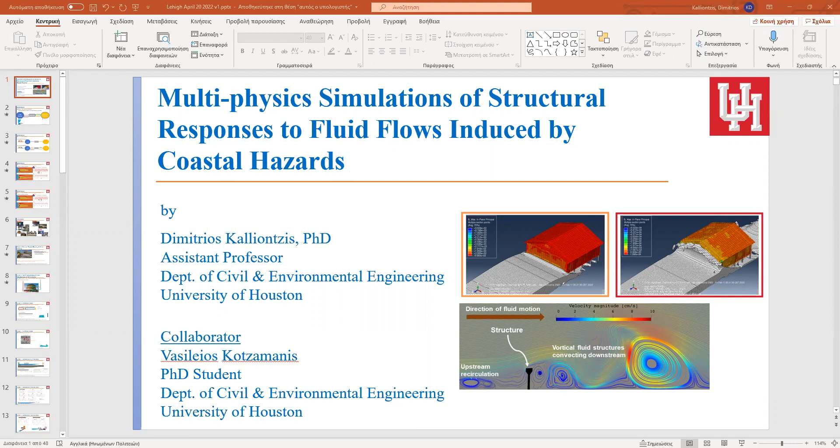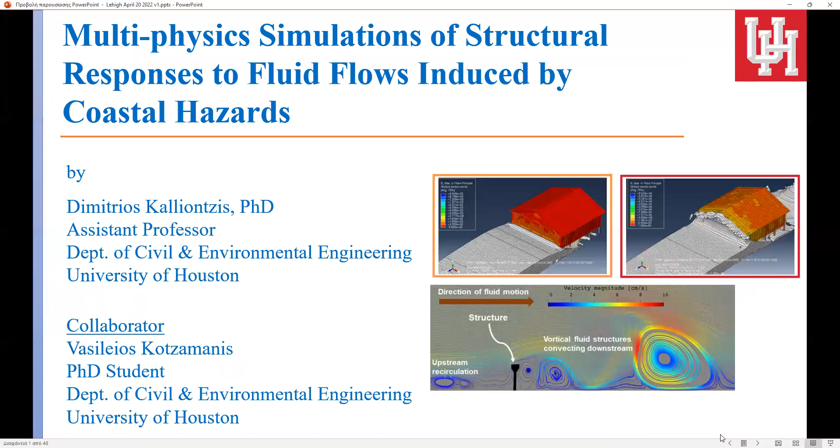So in the first, Dimitrios, sorry, yes—can I interrupt you a minute? Because we only see the first slide, your title slide. Are you still on that title slide? Oh, really? No, no, I'm sorry to interrupt. Maybe if you go into presentation mode, that may work better there. Yeah, thank you. Sorry for interrupting. Oh, okay, I thought—sorry, I'd give it a little bit of time to make sure. Okay, thanks. Yeah, thanks Jim, I didn't pick up on that. I thought the presentation was moving forward because to me it was, but how about now? Is it better? You're good now. The background slide is now... Okay, okay, great. I thought that was on.

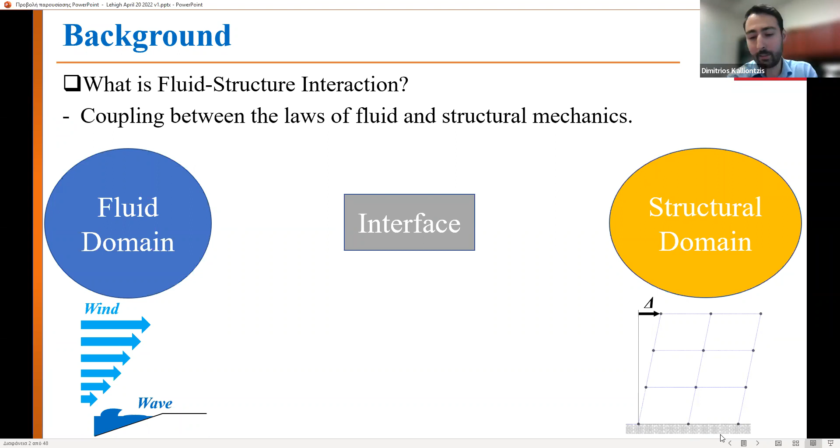So yeah, basically, let me go back a little bit in my discussion so that everyone follows up on what I'm talking about.

So again, I'll go through the definition of fluid structure interaction. What I was mentioning is that in fluid structure interaction, you have the fluid domain, the interface between the structure and the fluid, and the structural domain. Usually the fluid forces are transferred to the interface, then from the interface back to the structure, and the structural deformations also go back to the interface, affecting the behavior of the fluid domain.

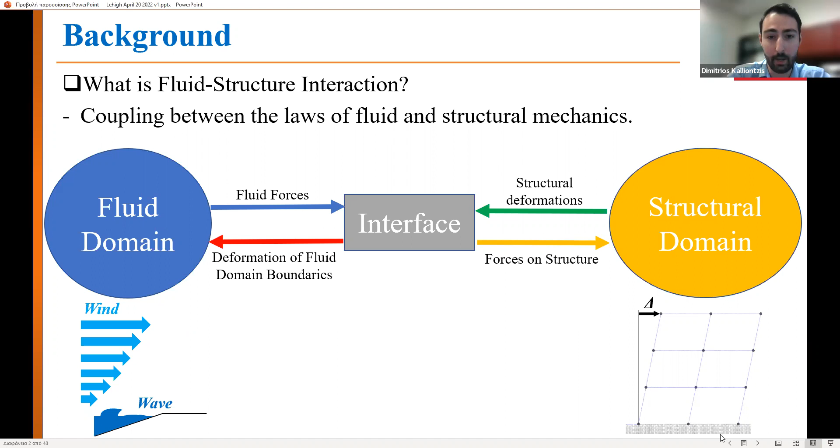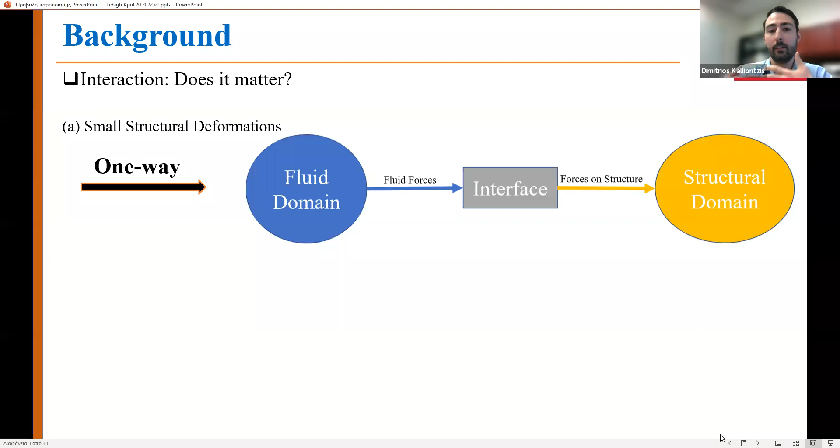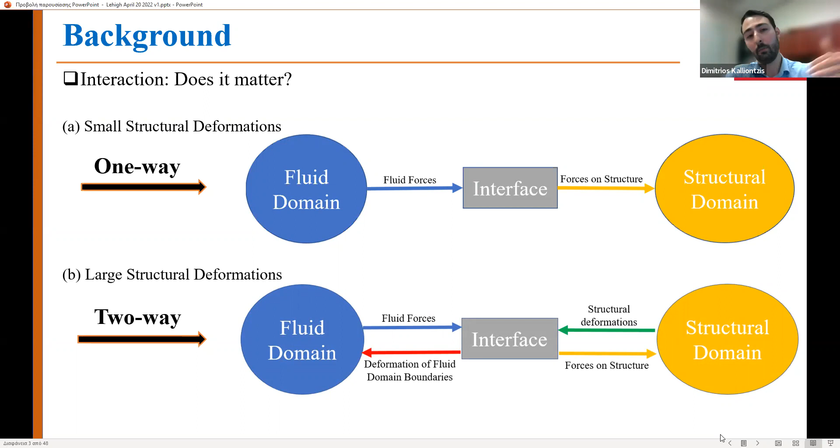So then what I talked about is that you can have two types of interactions. Either one-way interaction, which is usually the case with very small structural deformations that may not affect the behavior of the fluid domain, or two-way interaction, where you have large structural deformations and you do need to transfer the information generated from the structural behavior back to the fluid domain. So that separates the two, one-way and two-way.

And here I show one example trying to address this question of why the interaction really matters, and whether we should actually transfer the information back to the fluid.

So you do have a variation in the behavior. For example, you see that the frequencies of the oscillations vary, and also you have some difference in the force that the structure is experiencing.

Then I have another example where I compare this very small deformations case to where we have large level structural deformations. In the first case, with small displacements, the frequencies of the oscillations are different. In the large displacement case, the frequency of the oscillations is affected by this loop of information going from the fluid to the structure and back to the fluid.

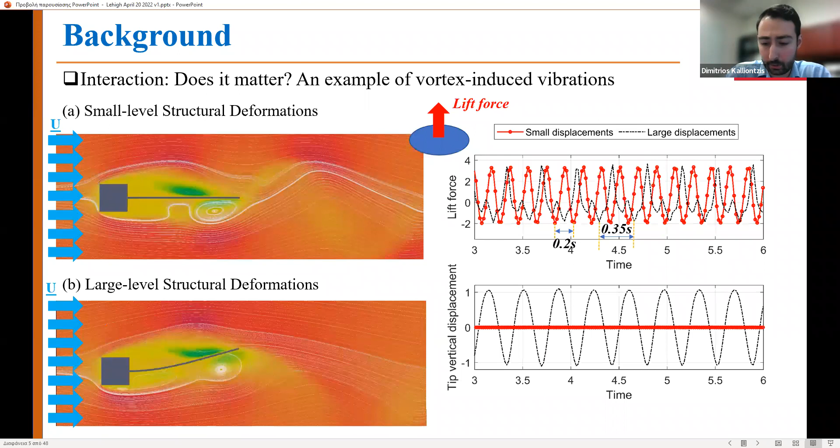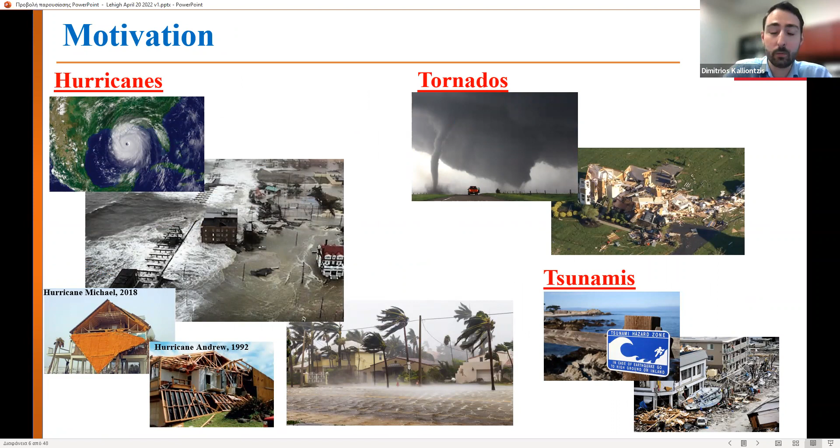So there are many cases in nature where we may need to pay attention to this two-way type of FSI behavior. Why do we care about this in civil infrastructure? Because we have many types of problems related to fluid loads applied to structures, that can be due to wind or due to wave loading.

The first study we tried to approach here at the University of Houston related to elevated coastal housing. The reason for elevating is that in many cases when you have a coastal house near the shoreline, you have waves and surge, and by elevating the house, you reduce or even completely avoid the wave loading to the housing.

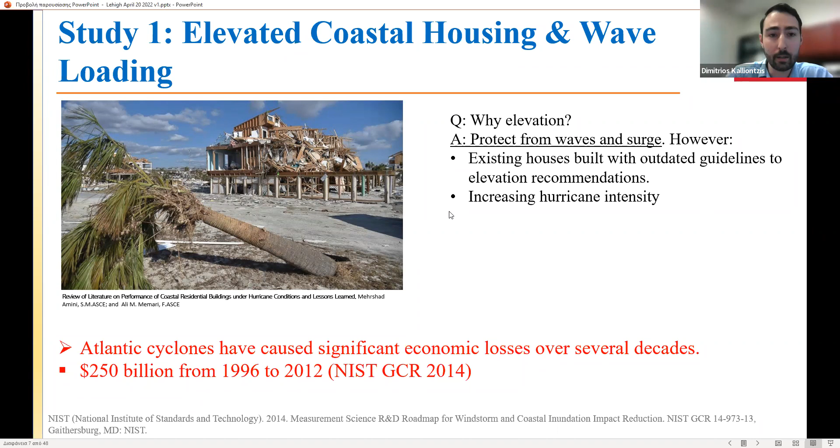However, there is still motivation to look into the wave loading affecting the houses, mainly because some of those houses were built with outdated guidelines related to elevation, and also there's the issue of increasing hurricane intensity, so in the future we may have to encounter larger waves.

So in this type of problem, we try to look into two sources of flexibility for the structural system. One relates to the effect of the timber-to-timber connection for light frame elevated coastal houses, and then we also looked at the SSI, or the effect of the foundation flexibility.

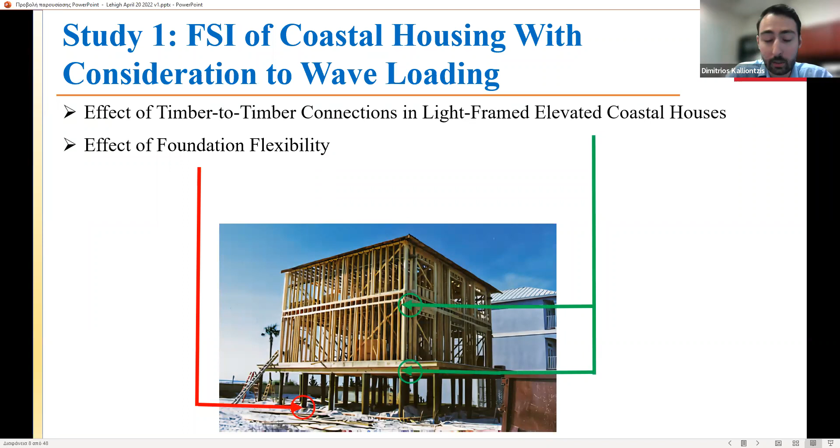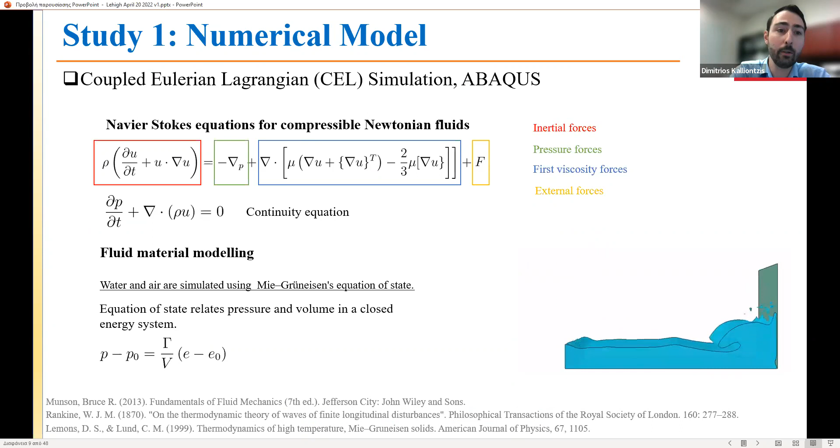For this study, we tried to use an existing framework for simulation. It's in Abaqus, called a coupled Eulerian Lagrangian simulation. In fact, this is what is called an immersed boundary method that is being used in Abaqus.

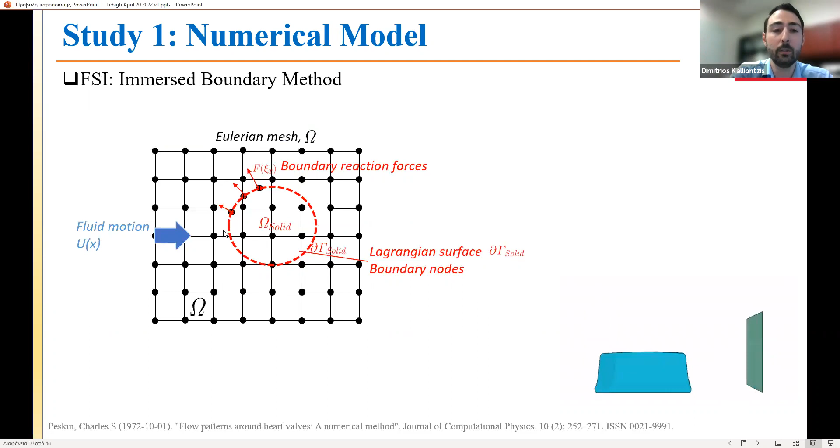The nice thing about this method is that you build your Eulerian mesh and then immerse the structure into this domain. It's also named in the literature as an interface capturing approach, where you only have to use some kind of interpolation function to establish the interface between the structure and the fluid.

So before we embarked on actually solving the problem we're after, we tried to use existing data to compare with the capabilities of this method in Abaqus, and how well it can capture experimental data. So we looked at a problem that was solved in an experiment at Oregon State.

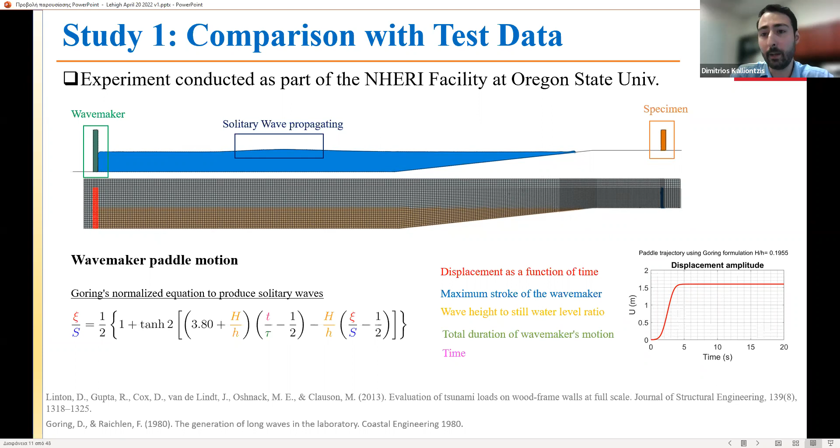There was a wave maker producing a solitary wave, and there was a relatively rigid specimen on the other end that would experience the wave and measure the pressures on the specimen.

In the first comparison, we compared the wave profiles generated in Abaqus and in the experimental setup. Overall, I think the wave profile was captured pretty well. There was only one case where we were not able to capture the wave, just before the crashing of the wave, and this could have been because of some nonlinearity at the discontinuity of the surface of the coast, which is an issue we're still investigating.

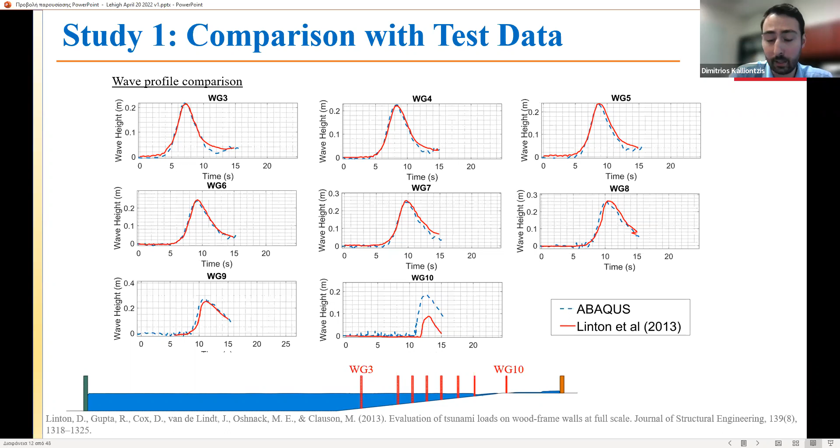There was also some numerical analysis before trying to capture this wave profile, the crashing, and it was not able to either. It was having similar results to ours.

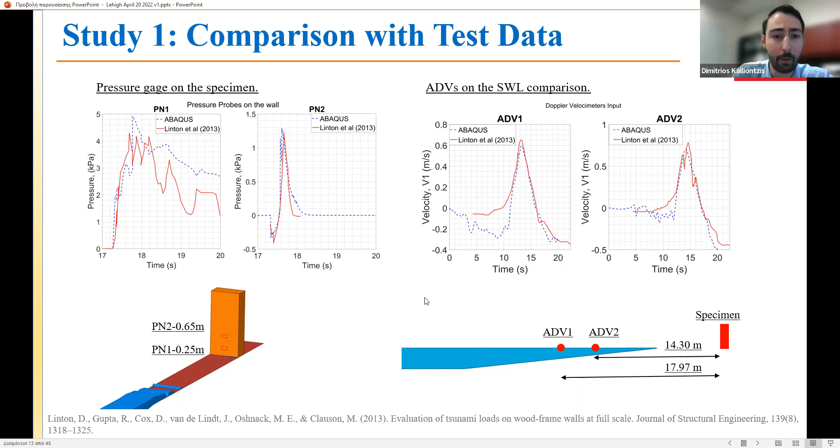So here is some comparison also on the pressure gauges that were on the specimen. This is kind of more localized comparisons, and then some comparisons on the velocity meters that were also installed at different locations. Overall, I think the comparisons were pretty fair for our application.

So we moved forward with modeling of a coastal house that was developed based on FEMA P499.

It was some recommendations for the construction. So it was an elevated house, and it's light framed, and then it was also having some piles that were, I think, 10 times embedded into the soil, 10 times the diameter of the pile.

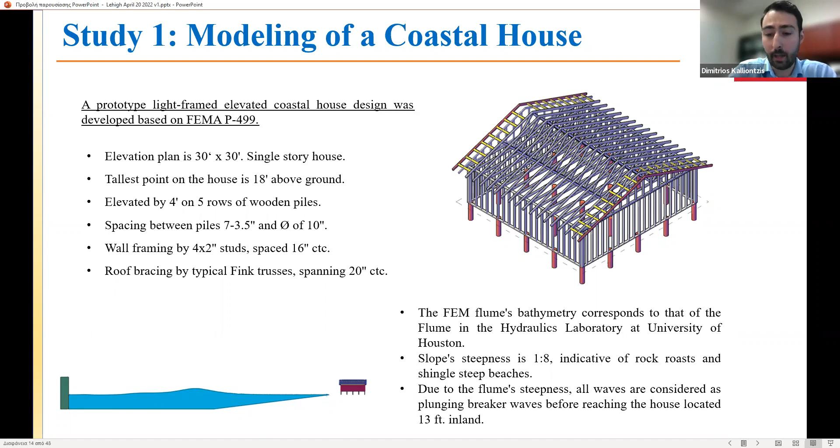This is some details of the finite element model. So it's based on shell elements for the front facade, and that also included the timber studs as stringers. That is an approach currently used in Abaqus, and we also modeled the pile foundation with PY springs. Some of the parameters we varied in our analysis, one was the effect of the connection flexibility.

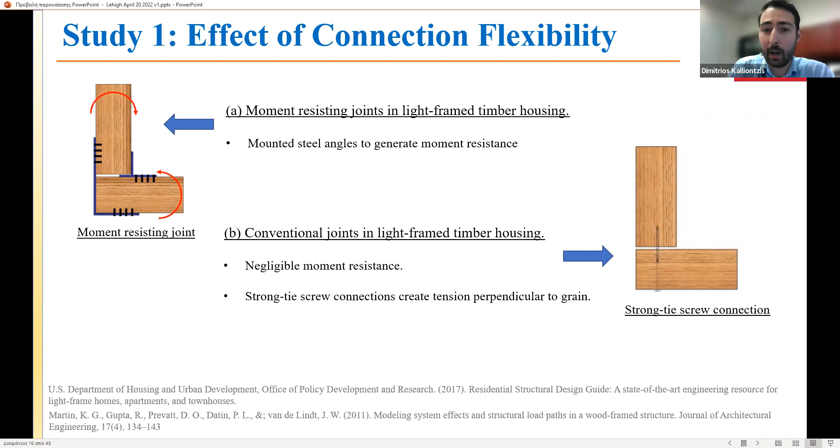One type of connection is a moment resisting connection, and another is more typical for this type of house, basically just providing a pin support. We also did analysis without considering the soil deformation, so the piles were constrained at the level of the soil, and then we also ran the analysis considering the flexibility of the soil using PY springs in this case.

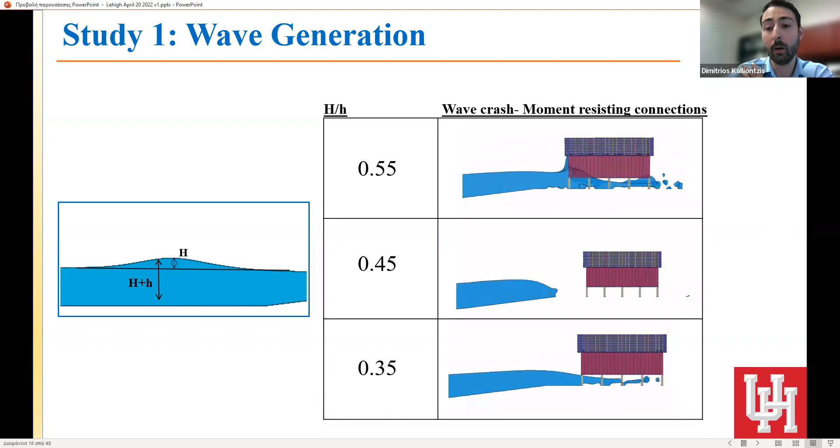This is a demonstration for three types of waves that we ran with different heights. In one case, the top case, it was a higher wave causing a higher surge on the house, then a medium level surge, and then a smaller surge. In the third case, the wave was barely touching the house, but still some surge and some force developed on the facade.

Based on that, we identified three types of phases in the interaction between the house and the wave. One was just when the wave touches the house. The second is when the surge takes place and ends, so the velocity at the peak of the surge is zero, and then the splashing back starts as the third phase.

Then we compared the three cases of waves. This is very well expected, that as you increase the height of the wave, the forces on the facade are certainly going to be higher. One thing we also notice in the case of the two worst wave scenarios is that you do have a peak happening, and then a drop, but then another increase in the force applied to the facade. This is certainly because when you have the splashing back, the trailing edge of the wave comes in and creates a second peak, which is not present in the case of the lowest wave.

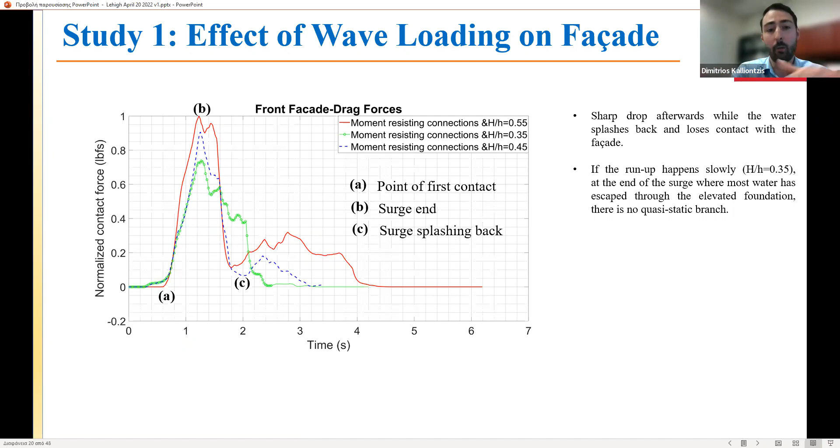And of course, there is no quasi-static phase here, because after the wave crashes and the splashing back takes place, you have all the water either withdrawing back or moving under the base of the structure.

One interesting result from this analysis was also that the flexibility of the structure does matter in the magnitude of the force that is being applied. I also want to note that this is just a linear elastic analysis in terms of the material, so we certainly have to, as a next step, move forward with nonlinear material behavior for the house. But even without that, you see that as the flexibility of the house increases, there is a significant increase to the force.

Why is that? The reason is because as the facade deflects, you allow more and more water to concentrate in front of the house. And as the trailing edge is approaching and more water is being concentrated, that is causing this increase in the force. You see here how that is demonstrated with the two types of connection, moment resisting and pin connection. Essentially, the front facade is acting like a bent, curved sea wall that retains increased wave volume, and that essentially increases the force.

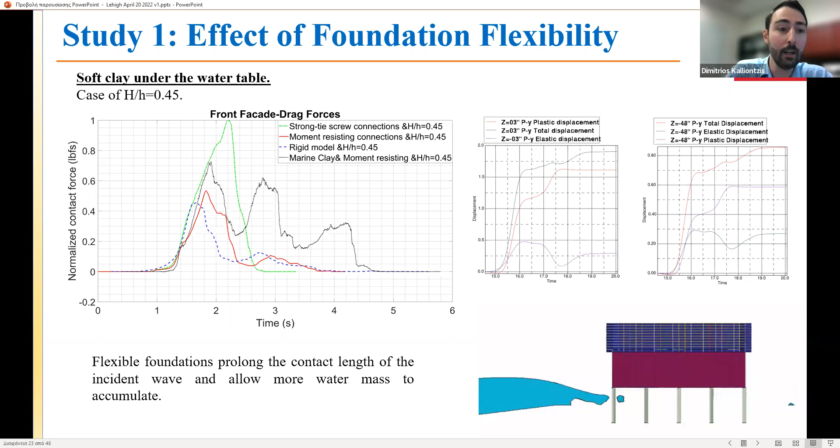You also see that you have fluctuation in the force being applied on the facade, and this is basically what I would call a semi-sloshing phenomenon, because you allow more water to come in, and then it recirculates locally in front of the facade, and that is causing this variation in the force.

So some conclusions from this first study: in the design of this type of house, and in many structures, we may need to reconsider the flexibility that comes either from the connections or from the soil behavior, as it can certainly play a role in the interaction of waves with coastal housing.

Of course, in all three cases of the coastal housing, regardless of whether it was a small wave or a larger wave, it may experience significant forces if the waves are allowed to surge on them. And this is certainly why FEMA suggests this elevation.

But still, even with that, some of the existing houses are still going to experience some kind of wave loading, because again, their elevation was not calculated based on the most updated recommendations, and also there is a danger of increasing hurricane intensity.

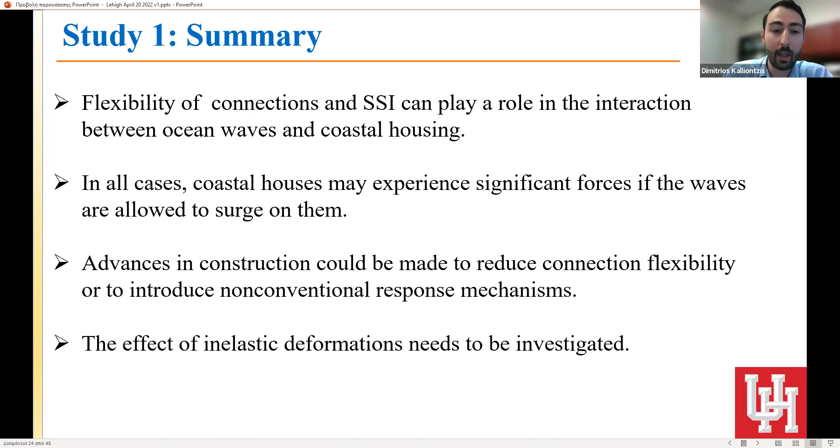So we may certainly consider new construction methods for this type of housing, or also try to think about non-conventional response mechanisms, as we have done for many years in seismic design.

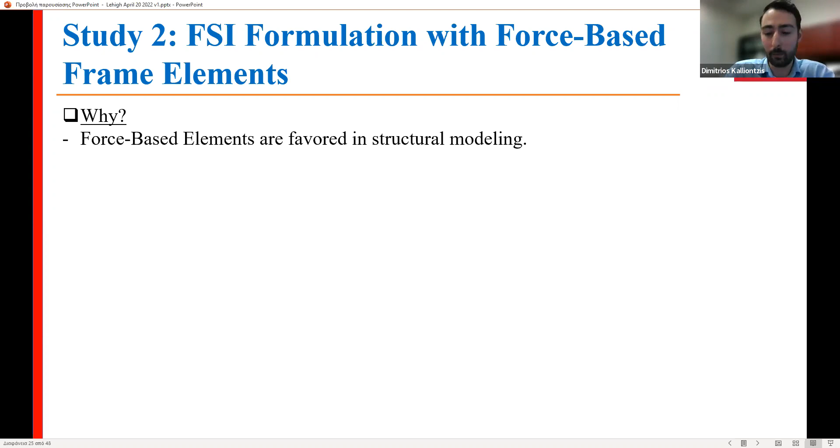So in the second study, we also tried to approach this fluid-structure interaction phenomenon in a different way. Yes, 3D analysis, 3D elements such as what Abaqus offers, are great, but in structural engineering we are very familiar with, and really like using, force-based elements.

So why is that? It's because we can certainly model large structures with a lower computational cost and still get very accurate results.

Of course, force-based elements are well used in the Lehigh simulation facility, and they're very well known. They're also well established in OpenSees and other types of software.

This is a classical force-based element that was developed in 1991 by Taucer, and then Spacone also established that in a journal paper. From then on, there have been many improvements.

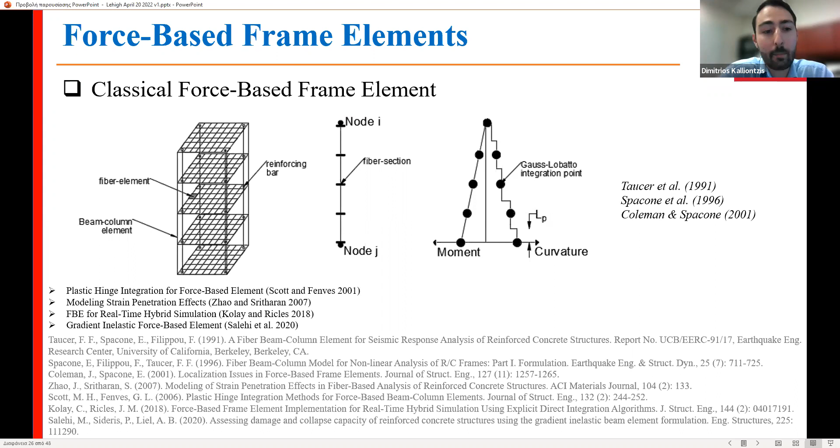There have been cases where plastic hinge integration was introduced, strain penetration effects, and there's also another force-based element developed a little more recently at Lehigh to enable real-time hybrid simulations. There are other methods being developed as well.

From our side, I also did some work back when I was a postdoc at UCSD. We developed a force-based element to incorporate axial load, flexure, and shear interaction, which doesn't currently exist in many of these elements. The beauty of this is that you can model any type of structural member with just a single element, which matters a lot for computational cost.

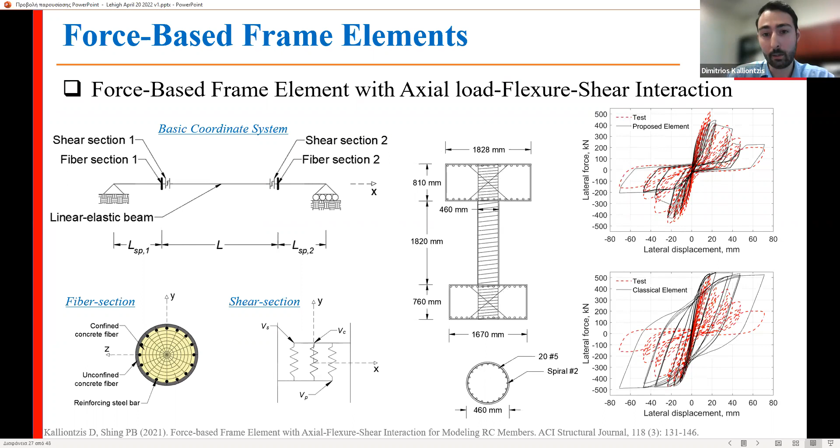So what is the concern of using force-based elements in FSI simulation? First of all, they are one-dimensional elements, so they do not explicitly represent the physical structural geometry in the computational domain. So if you have a tapered section, how are you going to capture this in a fluid-structure interaction? And why is this important? Because the shape of the structure does matter in the interaction.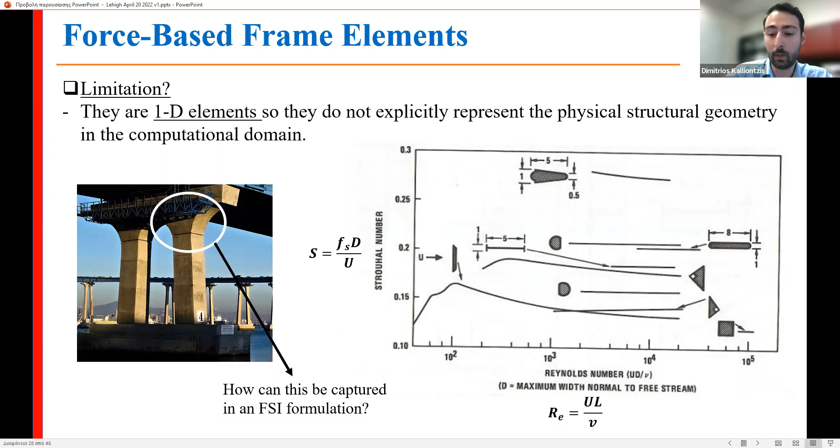This is old knowledge for the CFD folks who have been studying this for a long time, both experimentally and computationally, or even analytically, where we know that the shape of the structure does matter. So how are you going to capture this in a fluid-structure interaction domain?

So this is what triggered me to think a little differently and see how we could do that. Based on that, I developed an in-house code for fluid-structure interaction with the goal to incorporate force-based elements. The idea is very similar to existing problems, and the loop I described at the beginning of this presentation is still valid.

Now the difference is that the fluid domain interacts with an interface that represents the physical geometry of the structure, essentially consisting of a computational void. The interface motion is controlled by the force-based element, which is considered the skeleton of this void that represents the structure. So the fluid forces are transferred to the interface.

Those fluid forces transfer into what they call interface forces, and the interface forces are transferred to the nodes inside the force-based element. The force-based element, through beam theory, controls how the interface deforms, and then those deformations are transferred back to the fluid. So this is how I try to approach this problem and incorporate force-based elements in the FSI framework.

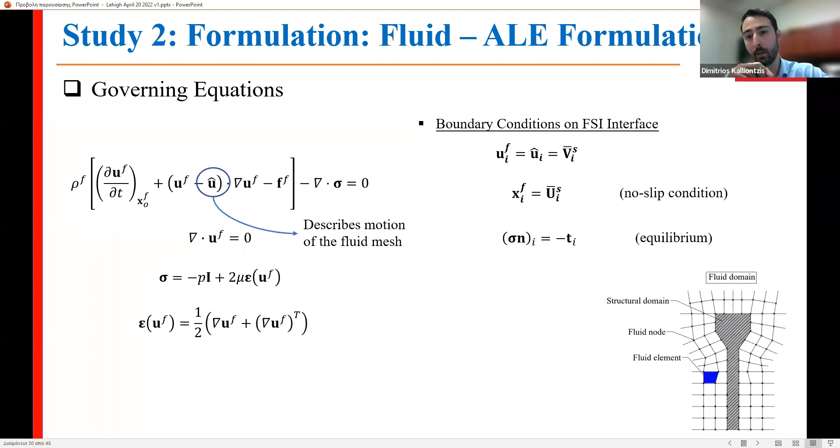Some of the boundary conditions are very similar, it's a no-slip condition at the interface. Essentially, that means the fluid particles cannot slip on the structure at the FSI interface, and then you have force equilibrium on the interface.

To demonstrate how this method works, instead of having a constant mesh as in the immersed boundary method that we used in Abaqus, the mesh is moving by following the forces and the movement of the structure. You see this happening here, where the structure interface is following the motion dictated by the force-based element, and this is happening through beam theory.

So the governing equations for the force-based element: in this case, I just use a linear elastic element, based on existing theory. The force interpolation function is used in this element, and I also use the consistent formulation for the mass matrix.

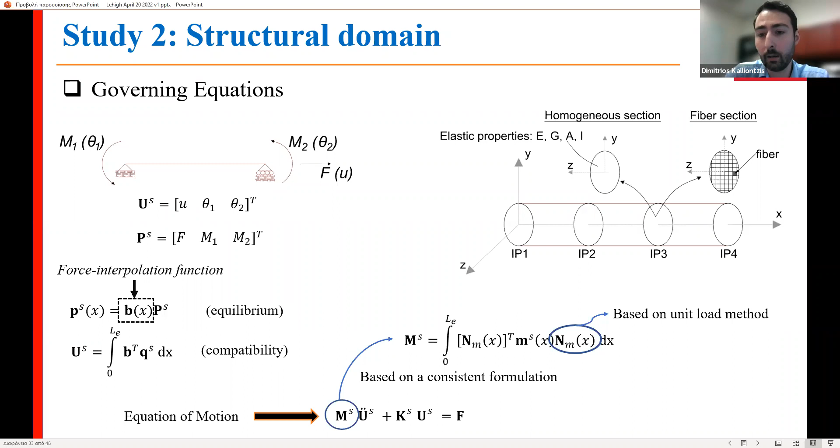As you know, force-based elements are based on the force interpolation function, so somehow you have to use a method to come up with the displacement shape functions. This is through a unit load method that I used.

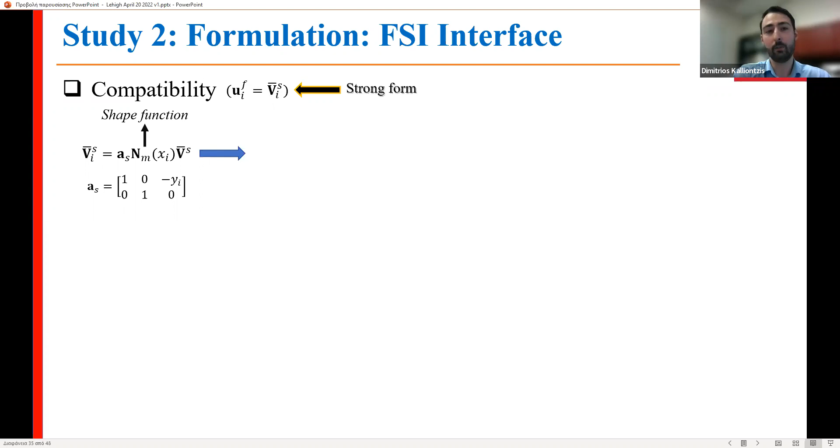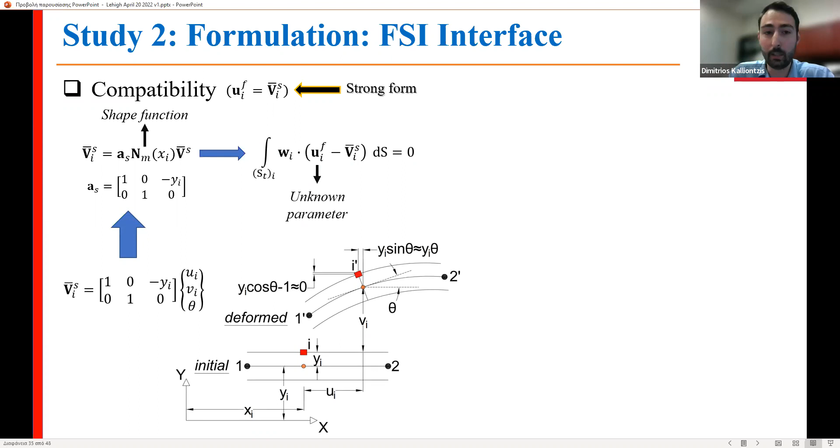And the compatibility in a similar sense - the no-slip condition dictates that the velocity of the structure at the interface is equal to the fluid particle velocity at the interface, again based on beam theory. It's approached in a weak sense, so the fluid velocity is treated as an unknown parameter in order to avoid instabilities, especially when you have added mass effects, which is a significant source of instability for FSI problems.

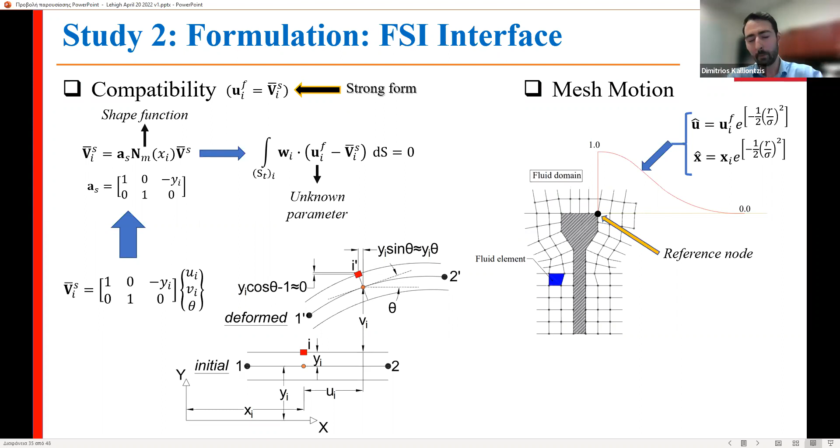For small deformations, the mesh motion can be done in many different ways. For small displacements, you can basically use a very simple Gaussian distribution, in other words, the fluid elements very close to the structural interface move almost rigidly, and as you move away from the interface, the motion of the fluid elements attenuates. This is what is called the arbitrary Lagrangian Eulerian formulation, because you can control the mesh motion arbitrarily without affecting the fluid motion.

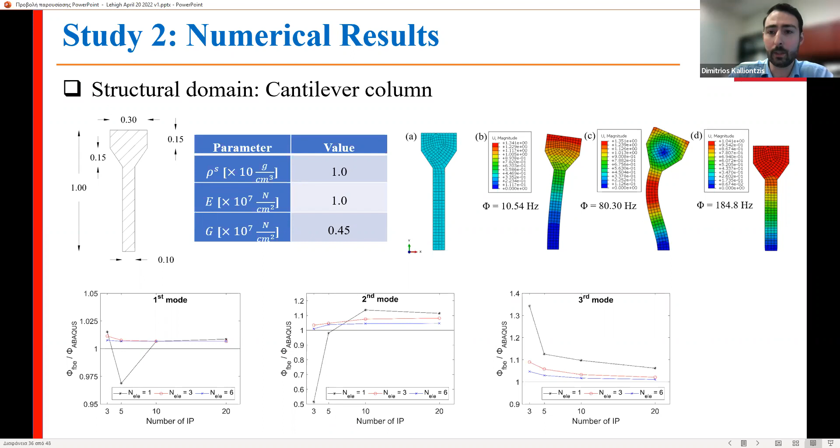Because this is a new code, I had to go through some validation. I did some modal analysis and compared it to results in Abaqus, just to verify that the analysis works as intended.

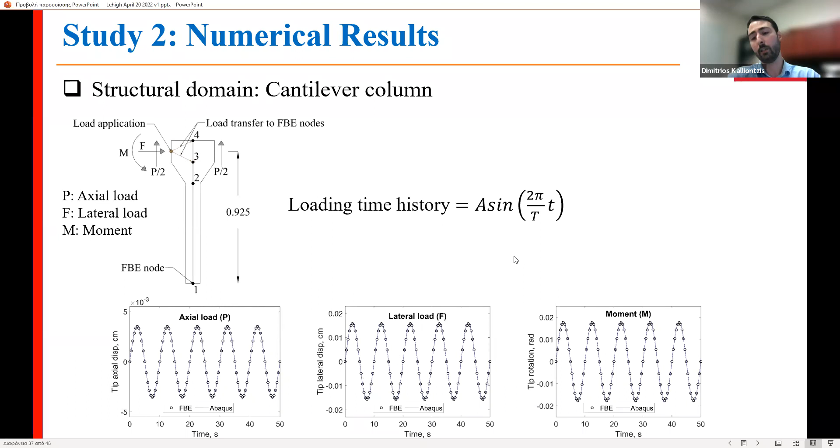I had two cases where I applied an oscillating axial load, and a lateral load and moment, somewhere at a point between the two nodes. I transferred that to the nodes, and compared these results to the Abaqus analysis, just to verify that the way I applied it is correct.

I also did some verification studies for the fluid domain itself, with no interaction. First I verified the structure part and the fluid part separately, and then, as I will show you, the fluid-structure interaction part. In this case, I used a benchmark problem for the fluid with three cases at different Reynolds numbers defining the problem. The first two result in a steady flow, and the third, with a value of 200, results in an unsteady flow.

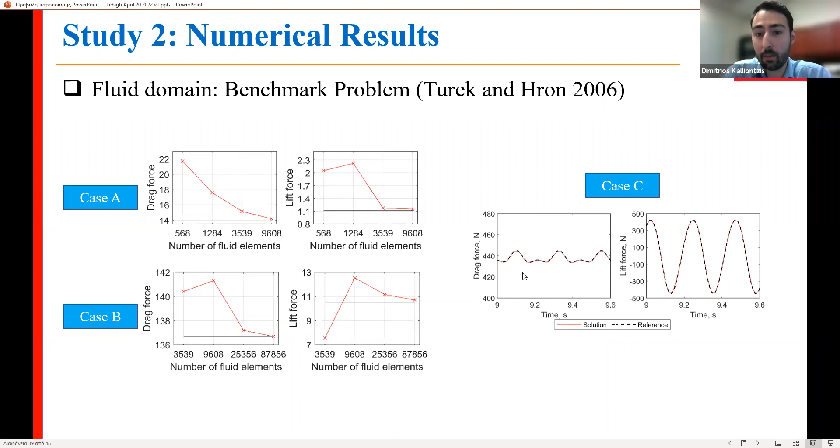For this case, I compared the forces, and then I did some mesh convergence analysis to see how well I can capture this. In the two cases, you see that the force is constant because it's a steady problem. Then in the third case, you see how the force varies since it's an unsteady problem.

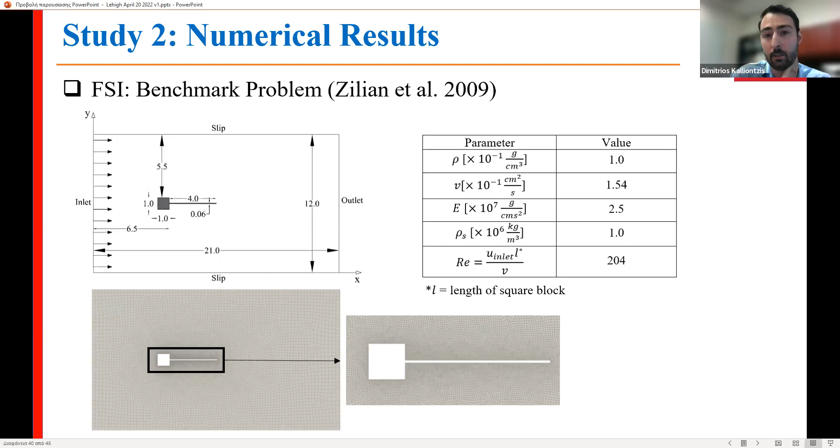So then I moved into another benchmark problem. This is an FSI, fluid structure interaction, for small displacements, so linear, geometrically near linear displacements. This is the comparison between the reference result and the different analyses I ran with different numbers of elements.

One thing I noticed is that the result for this type of problem is relatively insignificantly affected by the number of elements. If you vary from 2 to 6 force-based elements, the result is pretty consistent with the reference, which verifies something we know well in structural engineering: force-based elements are very powerful.

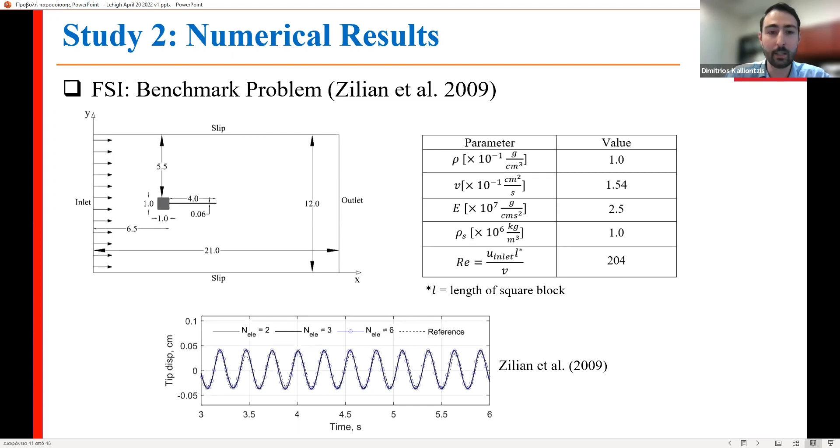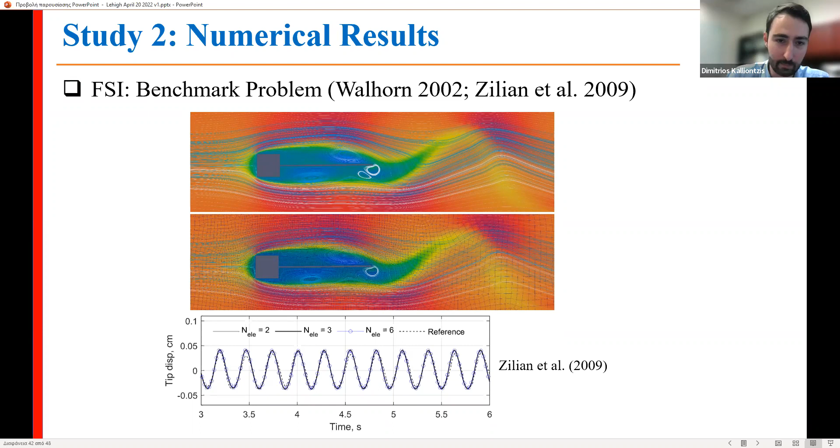This is some comparison of this analysis with a video I have. In one case, I show the mesh. In the other case, the mesh is hidden. But again, the mesh motion here was very small, so it was not significantly affecting the results. It was mainly controlled by this Gaussian distribution, a very simple case.

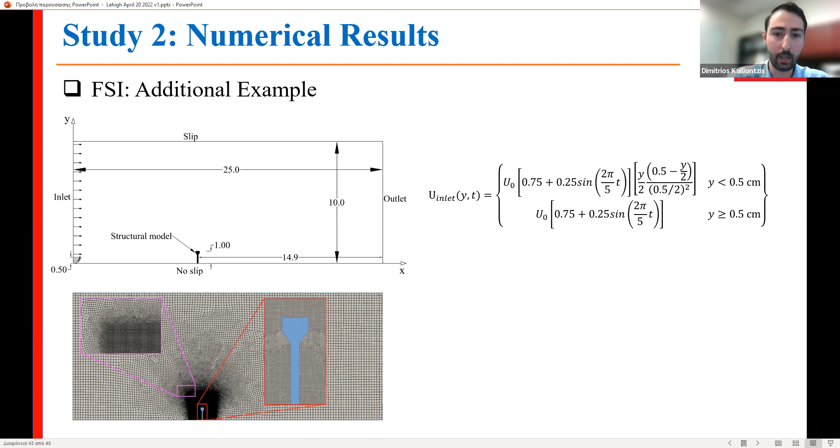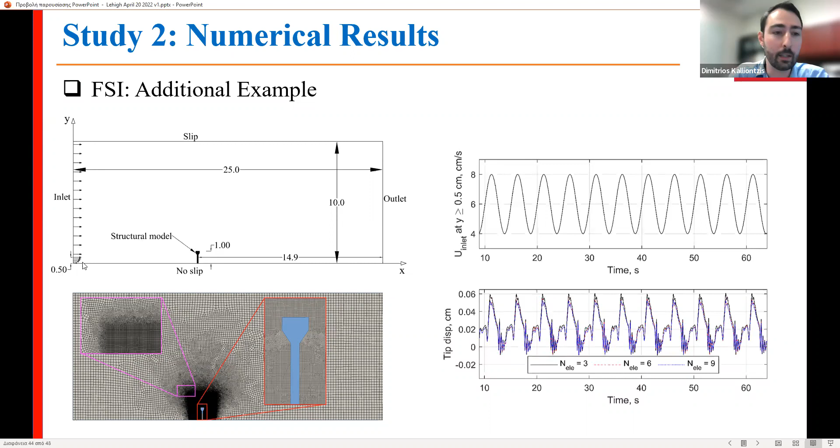I also tried a different type of analysis where I just have a vertical column. I did not have a benchmark problem to compare here, but I tried to see how powerful the code is. Here you see an inlet velocity that is parabolic at the base, with no slip, kind of simulating a type of wind flow.

One thing that was challenging in this analysis was the significant wake generated by the column. You see those big vortex structures that develop, and this is always an issue in computational fluid dynamics: when you have a significant wake, you have to make a long domain until the wake is damped.

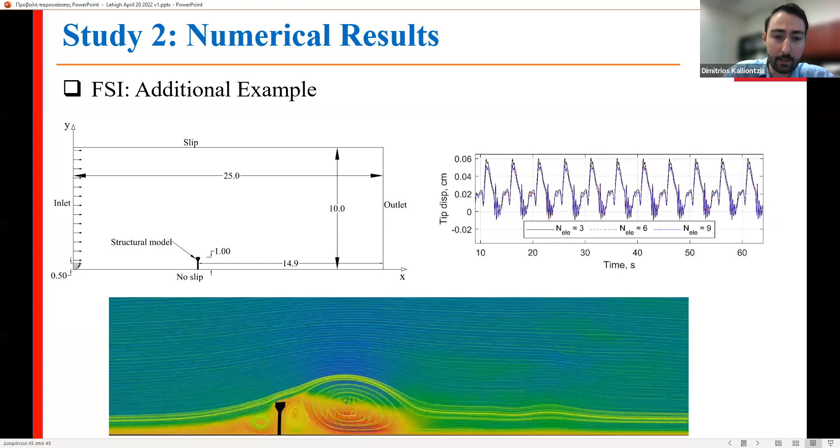But in this case, I tried to have a smaller domain and instead use what I call backflow stabilization at the end. One important part here is the mass balance—what gets into the domain also exits the domain. But if you have big wakes, that creates a negative inlet velocity at the outlet that can lead to significant instability. So I used backflow stabilization to enable this problem with as small a domain as possible.

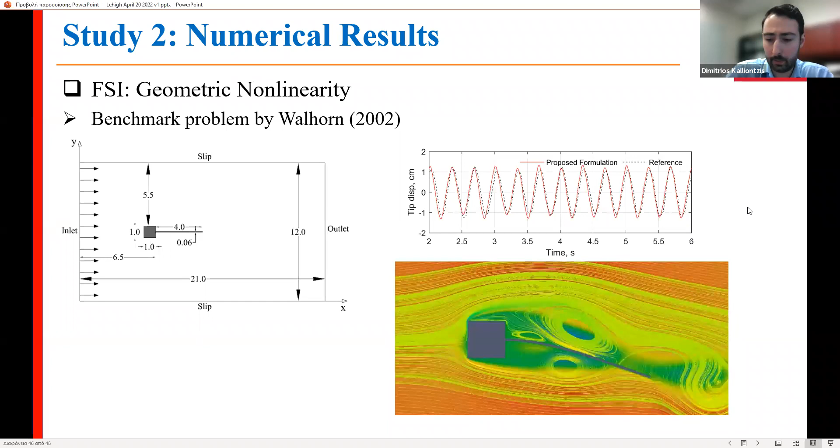More recently, I also used the co-rotational formulation for the force-based beam elements, and tried to compare to some experimental reference results for a benchmark problem. That is a very similar problem to the one I showed before, except the displacements, as you see, are much more significant. And that also showed a pretty good comparison.

So just a summary for this study: of course, we're not yet at the point of studying effects such as waves or wind loads in a turbulent sense, but this is where we're heading with this code. The first important step was to establish a code that can incorporate force-based elements and FSI calculations, have a correct representation of the geometry of the structure in the FSI domain, and then verify with some benchmark problems to ensure our code works as intended.

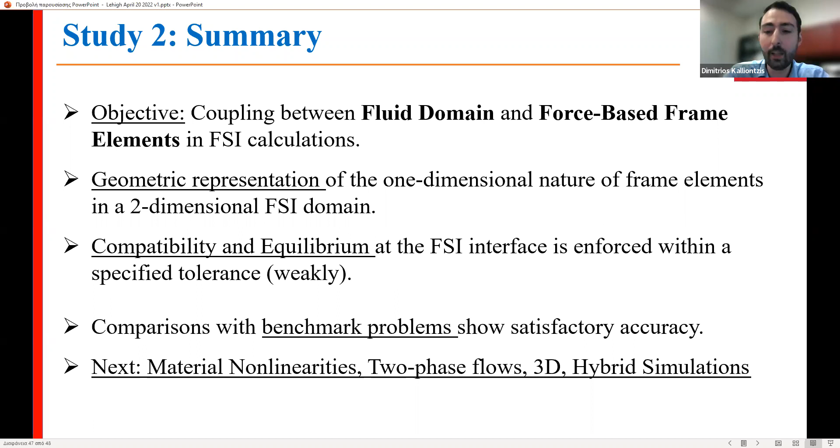The next step is to move towards material nonlinearities, two-phase flows, three-dimensional problems, and eventually, hopefully, use that for hybrid simulations. Of course, there is a long road until that can happen.

And this is some of the related publications. We're also presenting some of this work on EMI, and publishing some journal papers on it, but we're also still working on some of them. With that, I would like to thank you very much for your time, and I welcome any questions or suggestions.

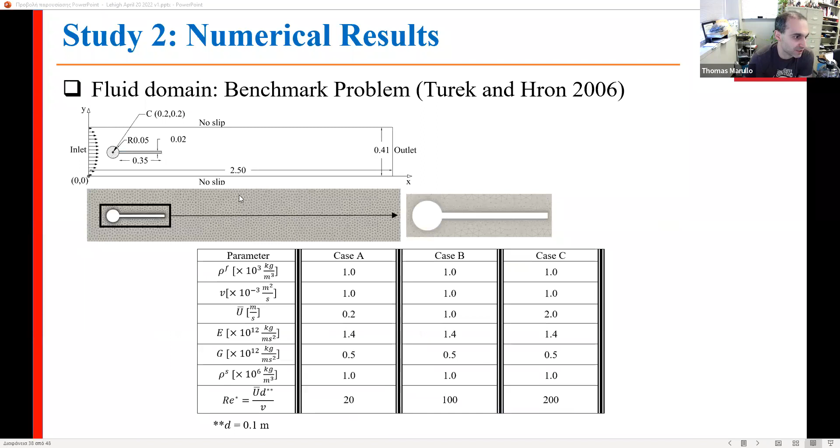Joaquin Morris asks regarding the force figure on slide 21 of 48: is this force the load applied by the fluid, water pressure integrated on the facade surface, or the structural load perceived by the structure obtained from the structural model? Let me pull up slide 21 and look at the question again.

From an equilibrium point of view, these two have to be the same. The load, as I mentioned, comes from the equilibrium condition at the interface. It's not only the pressure, it's the viscous effects that come in too. The way we calculate it is through the contact force enabled in Abaqus. The structural load perceived by the structure is equal to the fluid forces on the interface by equilibrium. I hope that answers the question.

If Joaquin wants to respond, go ahead please. Let me check if there's another question in the Q&A. Nothing yet. Dimitrios, I had a question, I had my hand raised, so I can wait for Tommy to get to the others. Oh, I'm looking at the wrong one. I'm going to lower your hand, but no, you can go ahead.

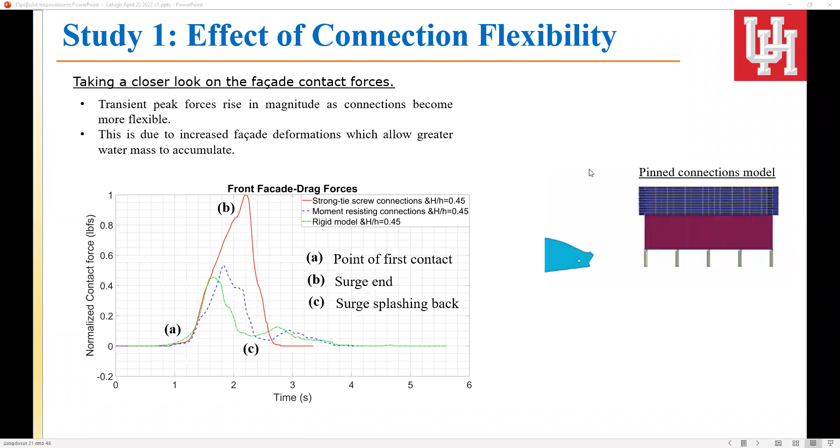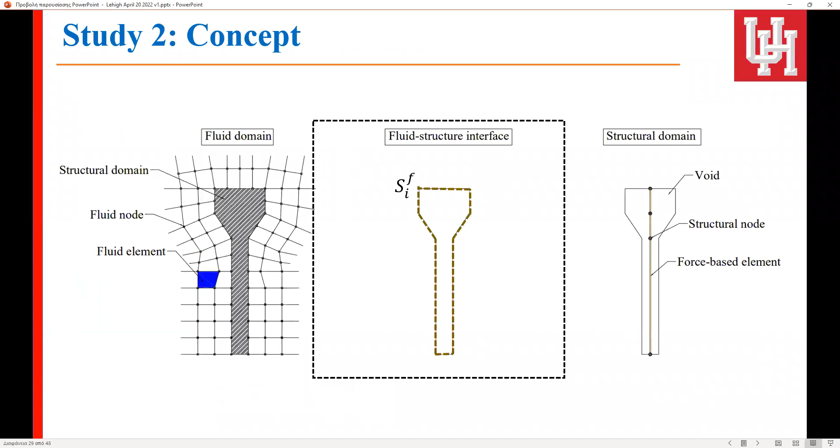What I wanted to ask is, in the fluid loading, how were you representing that fluid loading on the element itself? I saw a point in the middle of an element, but the fluid itself is a distributed type loading, so was it represented as such? Because I think the number of elements matters — for force-based elements, as you show, you can get by with fewer elements than if you use other formulations like displacement-based. So I think that point is just an illustration, but it's continuous — you're integrating along the element, the pressure over the length of the element, to get the moments and shears at the end of the element, right?

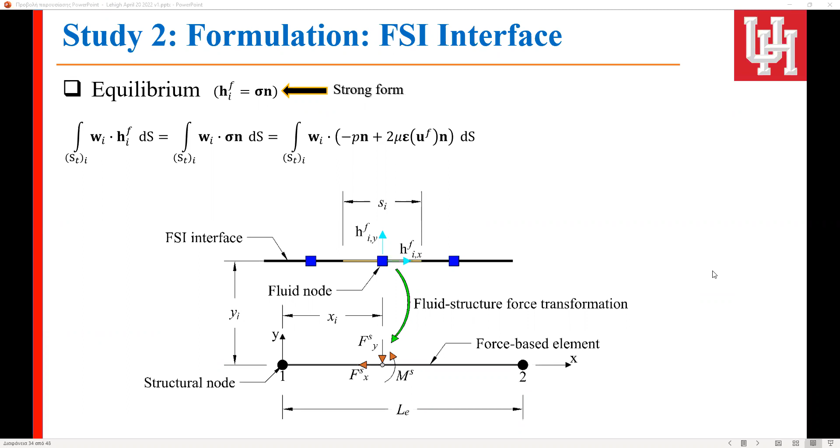Yes, that's a good question. This is what's called a non-matching mesh approach. There are approaches where you match the mesh, but even if you use displacement-based elements, it's very difficult to match the mesh in the fluid domain at the interface with the displacement-based element. I'm not sure how you'd do that. So these are meshed independently, which is also what's attractive about this approach. Here, at the FSI interface, the blue rectangles are essentially the fluid nodes on the interface, which you discretize with 1D elements for the 2D case.

Then you estimate the forces produced at a single node — essentially a horizontal and a vertical force. You have a lever arm I call Y sub I, which transfers that into loads on the element: axial, vertical or shear, and moment. The moment is basically produced by the lever arm. Then these element loads, you use equilibrium to transfer them into nodal loads. So you go through this transformation process to the element — these are element loads, but we need nodal loads in the formulation, so you use equilibrium to transfer them onto the nodes.

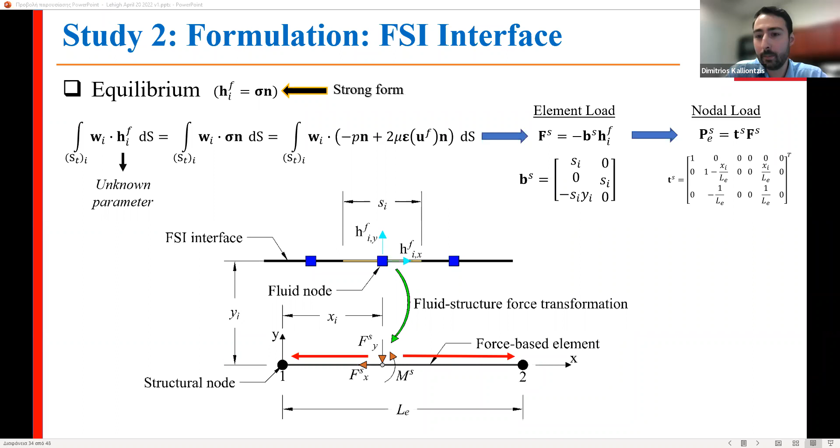We have another question, one question. Yeah, if you want to read it, you could read the question verbally out loud. Yeah, I can read it.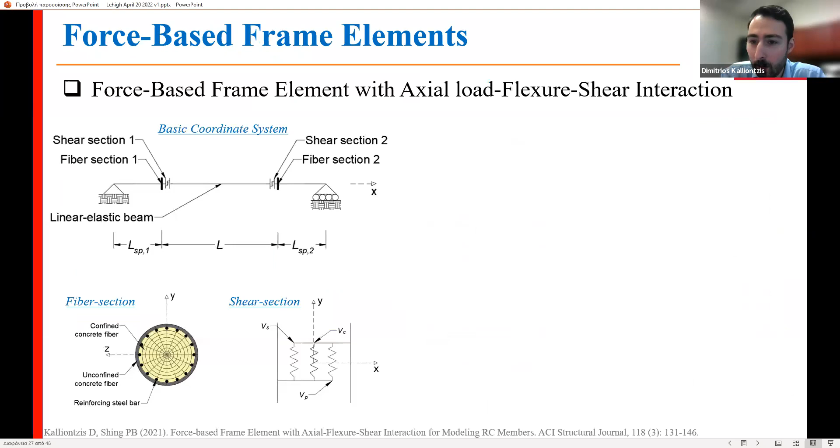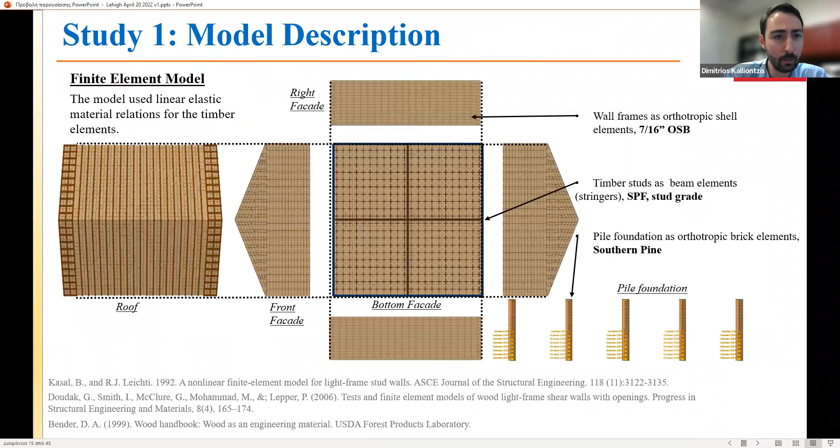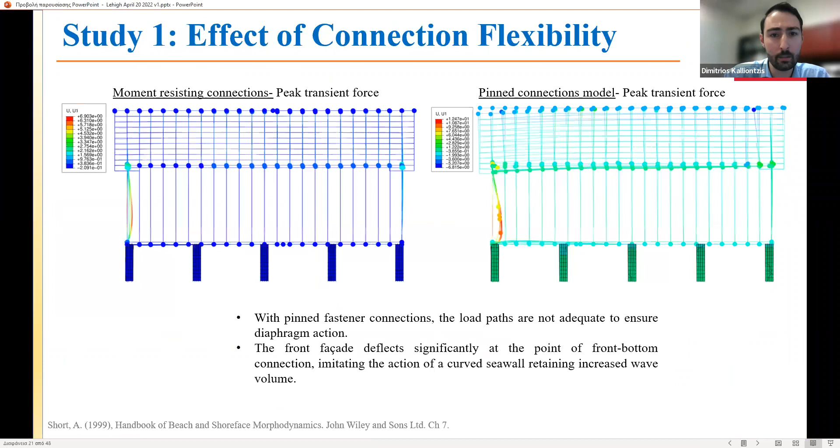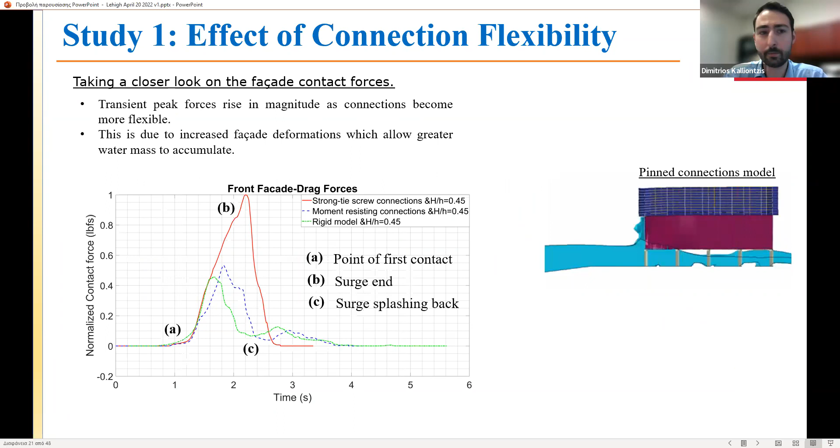So the question is, what is the soil type that you use when you account for the flow? Okay, so this is something that we're also trying to look into, different types of soils. For this one, let me check - we use a saturated clay, but let me try to find that. We use saturated clay, I believe, for this one, but we are still looking at different types of soil. This is not the end of it, we're kind of trying to look into it. Yeah, we looked at the saturated clay.

And then, did you rely on actual field data to estimate? Yes, I believe that the data that we got from this reference here are also based on experimental data that were used to derive the PY curves.

Okay, no other questions at this time. Jim, I'll leave it up to you if you have any final comments or conclusions to add, and then we could end the seminar. Yeah, I wanted to, sorry Tommy, I think you asked if I had any other comments or wanted to close the session. No, that's it. If you had, you could close our seminar if you like.

Well, first I wanted to thank you for your presentation. I think it's very informative. It's an evolving topic, and I know a lot of people are interested in trying to use an approach like this. So I think your work would be very important, and the audience didn't have as many questions. I don't think they're overwhelmed, they're just probably fascinated by what you're doing there. I know it's not an easy thing to do when you've got a structural engineering background, this is kind of multidisciplinary. So if someone wanted to get into this studying, generally speaking, traditional structural engineers, what would they need to do? They probably need to get some background in computational fluid dynamics, and combine that with their knowledge of structural analysis to be able to more competently perform analysis involving fluid structure interaction, versus taking a structure and just putting predefined sinusoidal loads. Is that what you would recommend if someone wanted to evolve into the field of fluid structure interaction?